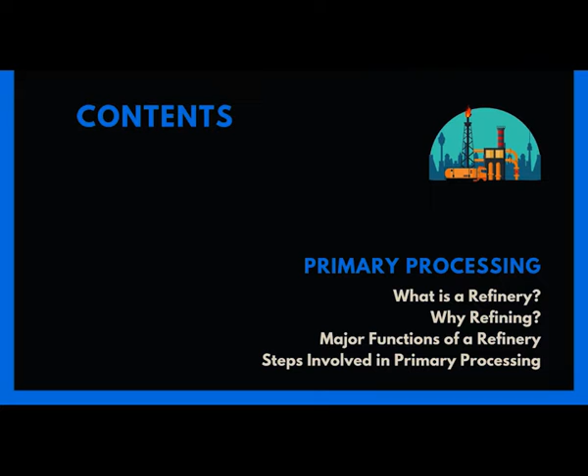Then in the last episode, we tried to know more about the petroleum products and their specifications. Now, today we are getting into the subject of the very first activity of primary processing. So, in this particular episode, we will try to know more about the definition of refinery, why refining, and what are the major functions in a refinery and the steps involved in the primary processing activity. Okay, now we will start from the basics.

What is a refinery? A refinery is a processing plant where crude oil is separated into various petroleum products. So, as we understand, crude oil is a mixture of 500 plus hydrocarbons, and this crude oil need to be separated using different processes. That is what happening in a petroleum refinery, and this is a classic example of a continuous process unit.

So, 24/7, 365 days a year. A refinery would run for almost 3 to 5 years, until the major turnaround maintenance happens. That is what a refinery is.

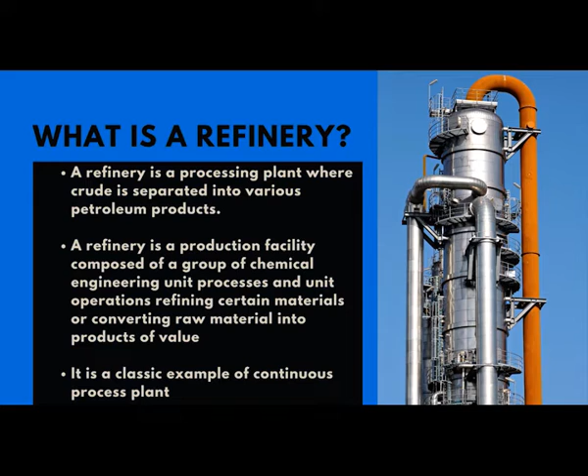And why at all we need to do the refining? So, we all hail crude oil as black gold. Though crude oil is very precious and considered as black gold, it is not going to be useful either as a fuel or a lubricant, because crude oil is a mixture of several hydrocarbons. It is difficult to handle crude oil for any purpose, and it also has got lot of impurities.

And this crude oil need to be separated into various fractions based on the boiling range, and finally we have to obtain fuels, lubricants and raw materials for petrochemical products, and that is what going to happen in a petroleum refinery.

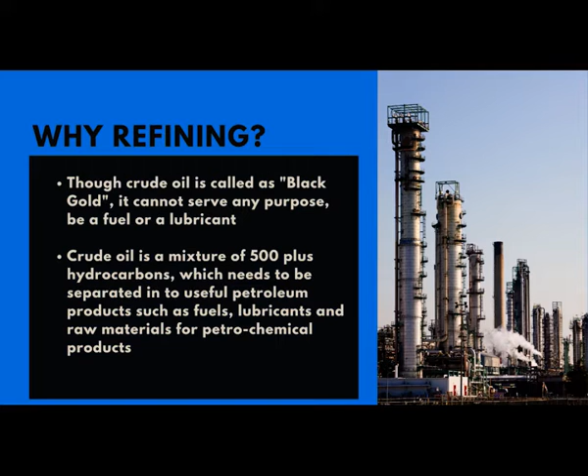There are several refineries across the globe, but each refinery is having a different kind of configuration. What does it mean? A refinery can have the primary processing unit and a number of secondary processing units. So, each process unit has got a set of objectives, and this process unit in the refinery and their capacities are determined primarily by products demand, product prices, product specifications and crude oil characteristics.

For example, an imported crude from Middle East cannot be processed in all the refineries. Similarly, an indigenous crude cannot be processed in all the refineries. Each refinery is built to process a set of particular characteristics of crude oil. So, if at all that particular crude is not available, they will try to blend different kind of crude oils and finally process it. So, that is where the configuration is going to change based on the crude oil characteristics.

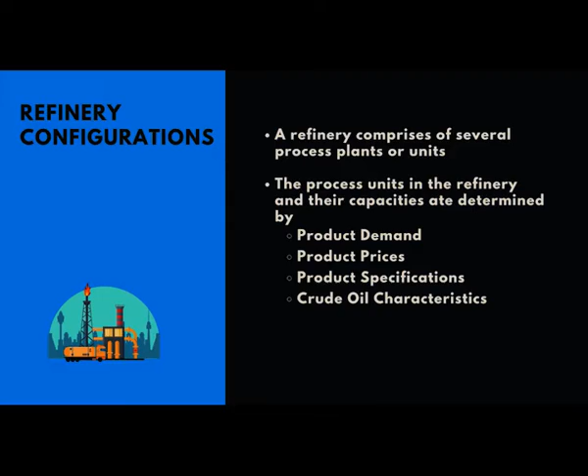Now, we will try to understand the different types of refineries. Number one is known as a topping refinery. A topping refinery is the simplest configuration where you have the primary processing unit which will have an atmospheric distillation unit, that is all. So, the crude oil is sent into the atmospheric distillation unit and you get all the products, and the residue is sold as fuel oil.

So, this topping refinery is very much suitable for a sweet crude which will not have any sulfur bearing components or any other impurities, and the residue can be directly sold as the fuel oil. So, there are few refineries across the globe where we have the topping refineries. So, this is possible only when you have the simplest form of crude oil.

But whenever you have a crude oil which has got sulfur bearing compounds, or the crude oil is highly viscous and heavy, then we need to have a complex setup. A complex refinery will have multiple units, and again the number of units will vary depending on the crude oil characteristics as well as, as I said earlier, the product demand, product price, etc.

A low complex refinery has lower and less value adding units, whereas a highly complex unit will have more number of units and most of the units will be adding value for the products. And this complexity of a refinery can be found using a formula, and this is known as Nelson's complexity factor. So, each refinery has got a complexity factor, and by knowing the number you will come to know which refinery is more complex than the other refinery.

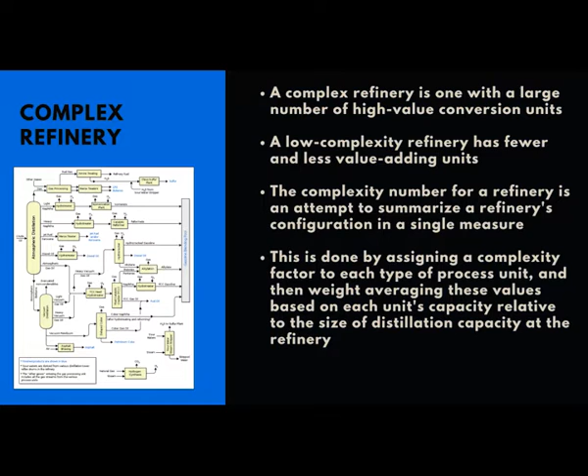And another way the refineries are classified is fuel based refinery and a lube based refinery.

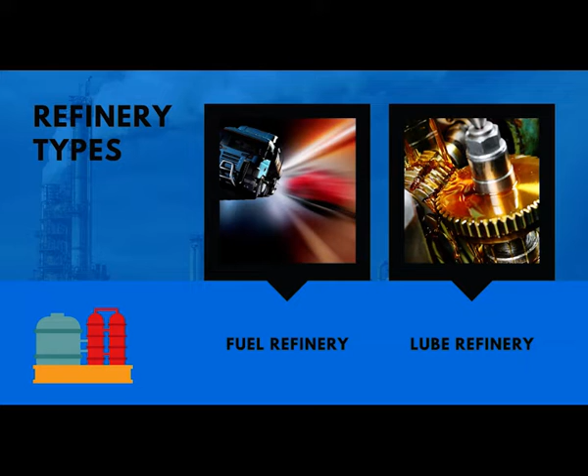Obviously, every refinery will be producing fuel products. These fuels may start with LPG, gasoline, diesel, kerosene, etc. But there are certain refineries which can also produce lube based oils or lubricants. So these refineries are lube based refinery or lube refinery, and to have this lube processing unit you are supposed to procure the specific crude having certain properties. Even in India we have 23 refineries, and all the refineries are not producing lubricants. There are very few refineries who produce lubricants. So in this way the refineries can be classified into a fuel refinery and a lube refinery.

Now, let us get into the major functions in a refinery. Number 1, primary processing. This is where the crude oil is split into major products starting with heavy naphtha, kerosene, diesel and residue oil. Then there are secondary units which are primarily meant to meet the quality specifications. Then the third set of units which are primarily meant for environmental specifications, and there are units where you will be converting the residual products into valuable products. You are trying to convert low value products into high value products, and finally you will have finishing and blending operations. So let us try to understand a little more about these functions.

The primary separation happens in an atmospheric distillation unit. Here crude oil is heated and sent to a distillation column, and inside the distillation column the different kinds of products are separated based on their boiling point ranges. Products from the primary separation stage would be LPG, naphtha, kerosene, diesel and the residue.

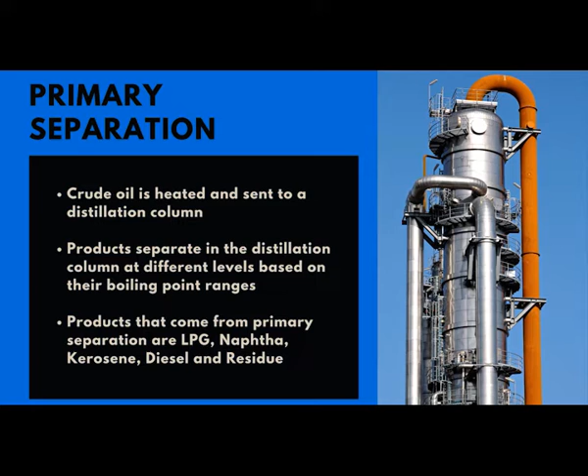Now let us try to understand more about the primary processing, how it is happening step by step. The very first step is the crude oil receipt and storage. For every refinery, the crude oil is either received through pipelines or through tankers. Most of the time the tanker will come and unload the crude oil parcel in the nearby port, and from there it will be received through pipeline.

There are multiple crude tanks which are known as mandatory tanks, and these tanks will be feeding to the refinery, and the multiple tanks will have multiple functions. For example, one tank may be receiving the crude oil from the port from the tanker, another tank may be feeding the process unit, and there will be blending operations happening from other tanks, and certain tanks will be doing the water removal process.

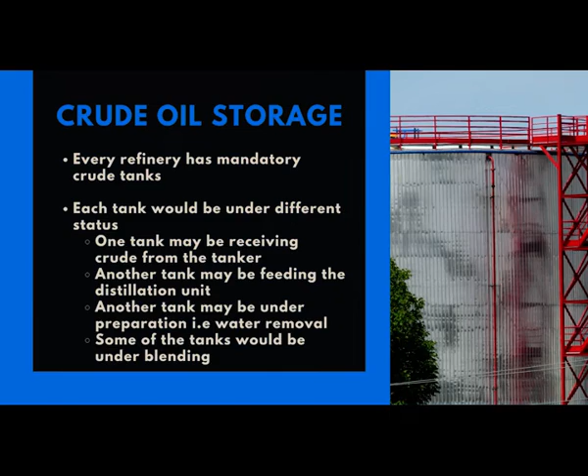So after receipt, and after measuring by using the gauging method, we will come to know how much crude oil we have received, and what is the water content inside the crude tank, and what will be the temperature, because the temperature is needed to figure out how much quantum in metric tons we have received. The measurement of the tank quantity will be in depth, and the depth will be converted into volume, and finally only when you know the specific gravity will you be able to figure out how much mass you have received.

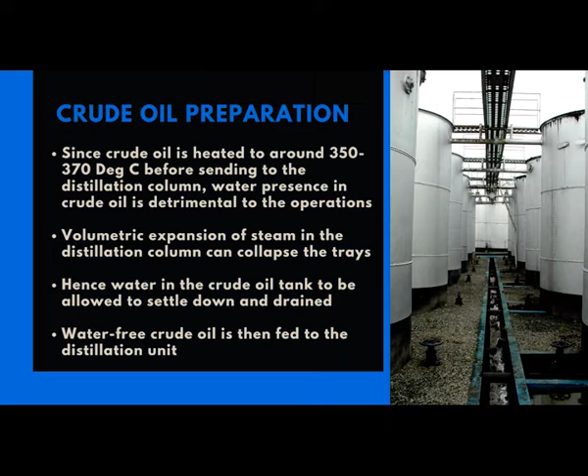We will also be taking a sample in the crude oil tank, and the crude oil would be heated inside the process unit before being sent into the distillation column, and the temperature heated would be 350 to 370 degrees centigrade. When crude oil is heated to such a high temperature, if water is present, that will be converted into steam, and the volumetric expansion of steam would collapse the internals of the distillation column. So for this reason the water should be thoroughly removed from the crude oil before sending it into the process plants.

So how do we do that? After receipt from the tanker, the crude oil is allowed to settle. Due to the density difference, water settles down, and by opening the drain valve, the entire water will be drained to the sewer pit, and finally the water free oil will be sent to the processing unit.

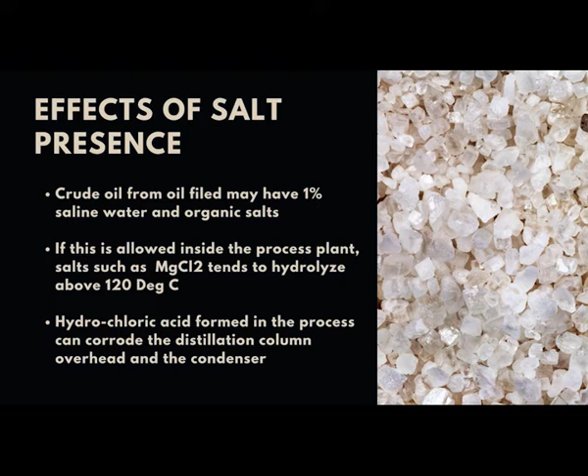Now, this crude oil will have some presence of salt, because crude oil from an oil field may have 1% of saline water and organic salt, and if this salt is allowed to go along with the crude oil, it is going to cause a lot of damage. There are several salts, and specifically magnesium chloride tends to hydrolyze above 120 degrees centigrade, and during this hydrolysis process hydrochloric acid is formed, and it can corrode the overhead of the distillation column as well as the condenser in the top portion of the distillation column. So it is very much essential that the salt present in the crude oil should be removed.

How can we do that? From the tank, the crude oil is pumped into the process unit, and it passes through a series of exchangers.

Why? Because the crude oil would be heated to around 350 to 370 degrees centigrade in a furnace before sending into the distillation column. To raise the temperature from ambient temperature to 350 degrees centigrade, you need to burn a lot of fuel. In order to reduce the load for the furnace, we try to preheat the crude oil in a set of heat exchangers known as the preheat train.

And where do we get the heat from? The heat is obtained from the products coming from the process unit before going to storage. They exchange heat with the crude oil, and in this process the crude oil gets preheated, while the products lose their temperature so that they can be safely stored. This is the preheating stage.

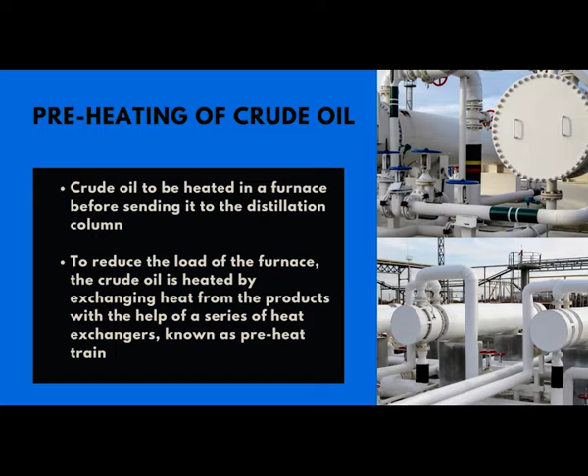After preheating, we have to remove the salt. We have already discussed the ill effects of salt and how it is detrimental for process operation. The salt removal, or desalting, happens in equipment known as a desalter. The desalter is nothing but a horizontal cylindrical equipment with provisions for high voltage electrostatic grids.

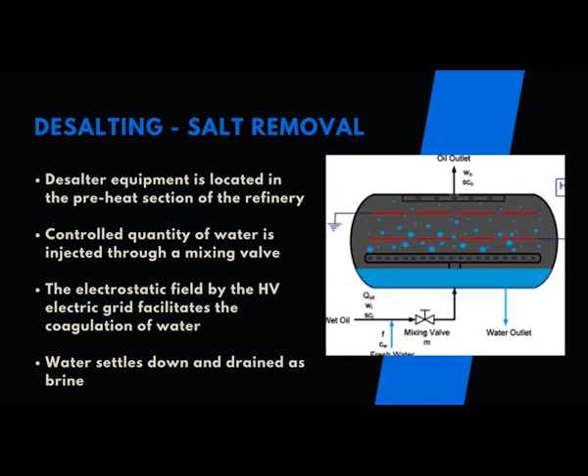Controlled quantity of water is added before the desalter through a mixing valve, and the water is thoroughly mixed with the crude oil. Finally, with the help of the electrostatic grid, the water particles get coagulated and settle down, and are continuously withdrawn from the desalter. The salt-free crude will move on to the next stage.

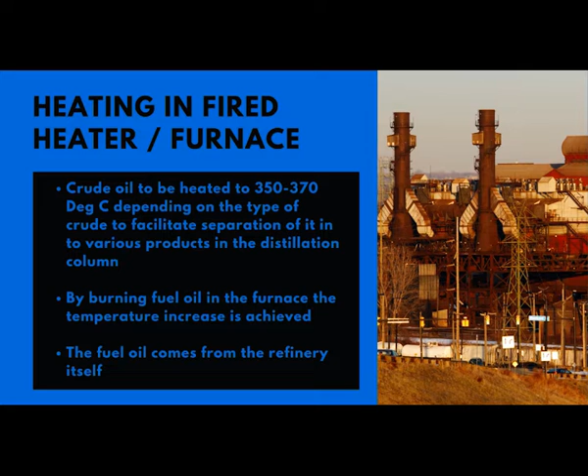As we discussed earlier, the temperature of the crude oil needs to be increased to 350 to 370 degrees centigrade. Only at this temperature will all the products effectively get separated. This happens in a place known as the fired heater or furnace, which is huge in capacity for this unit, and has provision to burn fuel oil generated from the refinery itself.

So the internal fuel oil is consumed as fuel for the furnace. After getting heated, this oil enters the distillation column. The primary separation of crude oil occurs in the atmospheric distillation column. The reason we call it this is because the column operates nearly at atmospheric pressure, whereas at other stages the columns may operate at either high pressure or vacuum. Hence it is known as atmospheric distillation.

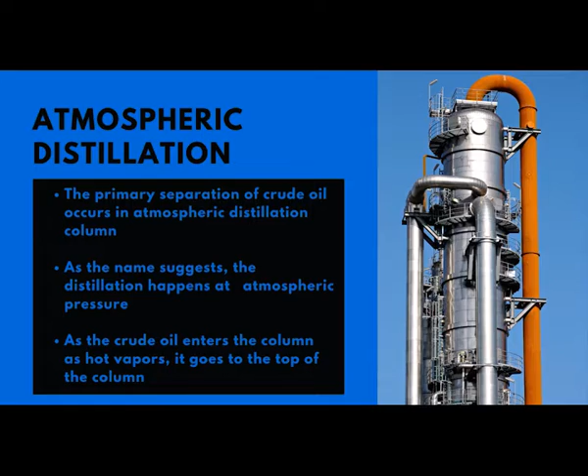As the crude oil hot vapors enter the distillation column, they start going up through the trays of the column, and as the vapors get condensed, the condensate comes back down to the bottom. When this vapor-liquid traffic equilibrium is reached, once steady state is reached, different kinds of products can be withdrawn from each tray.

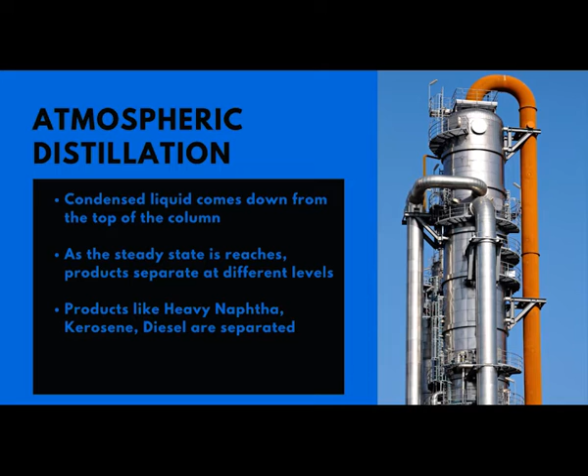So heavy naphtha, kerosene, diesel, etc., can be taken from different sections of the distillation column. The condensed liquid comes down from the top of the column, and as steady state is reached, product separation happens at different levels. Products like heavy naphtha, kerosene, and diesel are separated on a continuous basis.

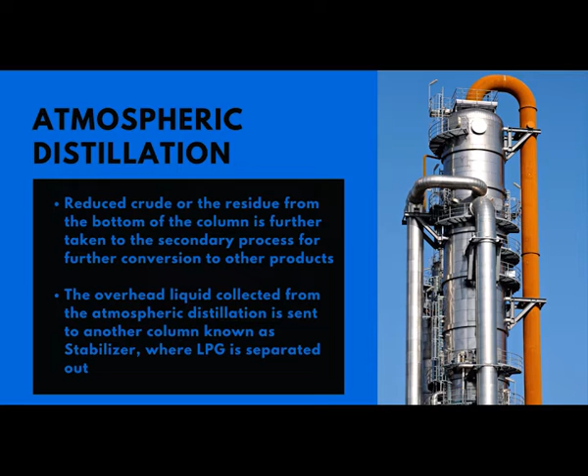The reduced crude oil, or residue, from the bottom of the column is taken to a secondary processing unit for further processing or conversion, because the residue cannot be directly sold in the market as it may not meet fuel oil specifications. On the contrary, the overhead liquids collected from the atmospheric distillation column are sent to another column known as a stabilizer, where LPG is separated and taken to the market.

As we mentioned earlier, there are some process units primarily meant to meet quality specifications. In atmospheric distillation, the very first separation of crude oil into various products happens. Now there are a few units where certain processes are carried out to meet product specifications.

A classic example is the improvement of octane number to meet gasoline specifications. Naphtha is a product from the atmospheric distillation column, but it has a very low octane number, and as automobile fuel you cannot send it to market directly. Octane number is a critical property of automobile fuel, and must be a minimum of 87. So naphtha with a low octane number of 40 to 60 is sent to a catalytic reformer unit, and the product octane number is enhanced to 87 or beyond.

Similarly, in the isomerization process, normal paraffin components of naphtha are converted into isoparaffins which have a higher octane number. So all this octane number improvement, primarily activities to meet quality specifications, happen in certain units.

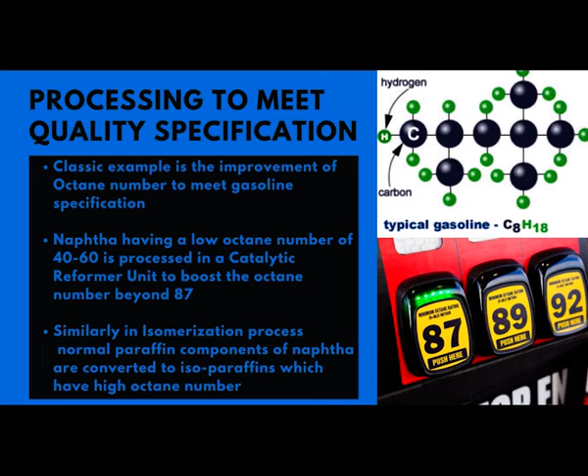Then we move on to certain process units which are primarily to meet environmental specifications. A classic example would be the desulfurization unit. From every product we have to remove the sulfur content to meet market specification, and for each product a dedicated desulfurization unit is available. Generally this is called hydro desulfurization unit, or HDS.

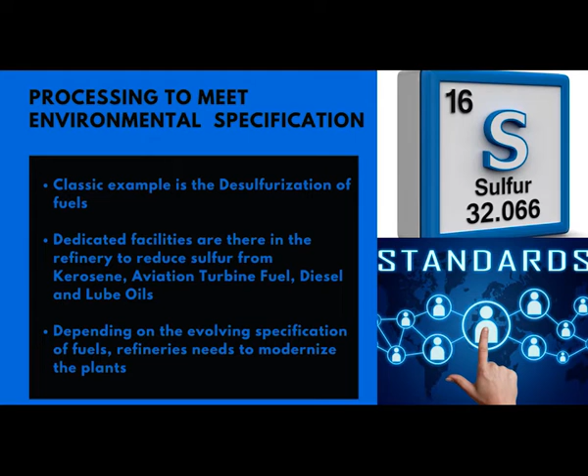Depending on the evolving specifications of fuels, refineries need to modernize the plant by having different kinds of process units.

Then yet another set of process units are meant for converting the residue into valuable products. As said earlier, the residue or reduced crude oil from the atmospheric distillation column cannot be taken to market, and this doesn't happen in a single stage. So this value addition, converting a low value product into a high value product, happens in multiple units. Some examples would be thermal cracker, fluid catalytic cracker, or hydrocracker unit. The residues are processed here, and different valuable products like LPG and gasoline are produced and then taken to market.

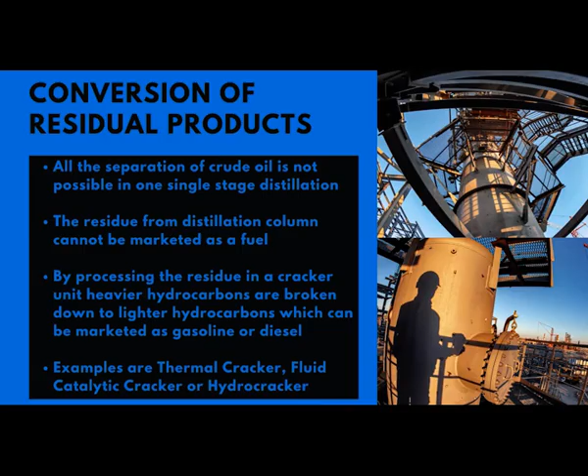Once the product is withdrawn from the process unit, we try to ensure the product exchanges heat with the crude oil, so the crude oil gets heated and the products lose their temperature. If not, we have specific product coolers, which are plain heat exchangers with cooling water. Once the cooled products are withdrawn, they are continuously taken to the storage tanks.

For every product we will have more than one tank. Some tanks will be receiving product from the refinery, some tanks will have blending activity going on, and some tanks will be feeding the end customer through depots or terminals. So here in product storage, the liquid products are stored in tanks.

I think all of you would have seen different kinds of tanks. They are stored in either fixed roof tanks or floating roof tanks. Depending on the boiling range of the hydrocarbon, the vaporization loss will be identified, and based on that, lighter hydrocarbons like naphtha, gasoline, kerosene, and diesel are all stored in floating roof tanks. But certain hydrocarbons like lubricating oils and fuel oil don't need to be stored in a floating roof tank; they can be stored in a fixed roof tank.

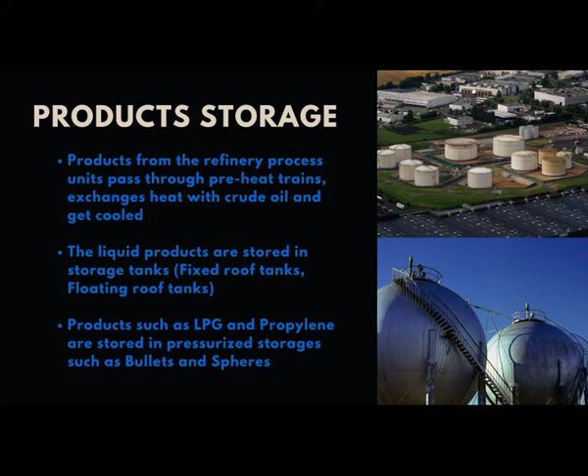In case of hydrocarbons which are liquid under pressure, they are stored in special vessels known as bullets and spheres. The classic examples of products stored in bullets and spheres would be LPG and propylene.

In the final stage, we try to blend the products. As soon as the products are stored, samples are taken and sent to the quality control lab, and for each product there are some key tests. Based on the key test, you'll be able to figure out whether the product can be taken to market or not. When the key tests don't meet specifications, we may have to do blending, which can happen through multiple means.

For example, kerosene and heavy naphtha can be blended with diesel, and diesel can be blended with light diesel oil. So there is scope for blending different kinds of products. Or you may have produced a particular fuel that isn't meeting specifications because of low value—for example, a batch of gasoline with a low octane number. What you can do is produce high octane gasoline and blend them, and finally it is tested again in the laboratory. Only when the laboratory gives clearance by means of a certificate of quality will you be able to pump it to the end customer.

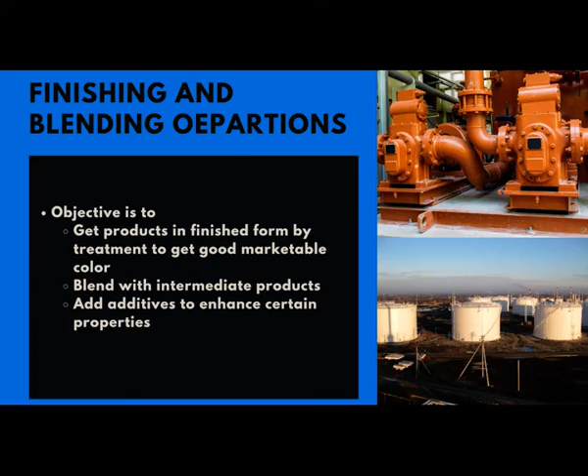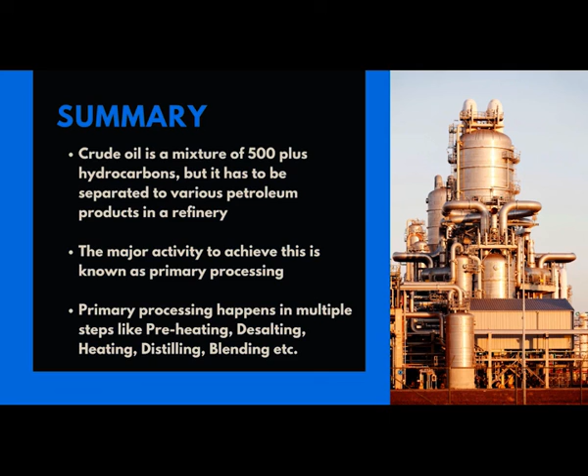In summary, today's episode tried to help us understand more about primary processing. Crude oil is a mixture of 500 plus hydrocarbons, but crude oil cannot be used as a fuel or lubricant; it does not serve any purpose as is. So the crude oil has to be separated into various petroleum products in a refinery. The major activity to achieve this is known as primary processing, which happens in multiple steps like preheating, salt removal or desalting, heating in a furnace, distillation, and finally blending. This is what we have tried to understand in today's episode.